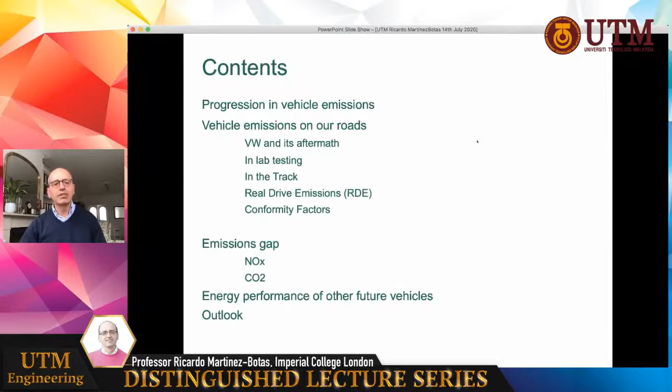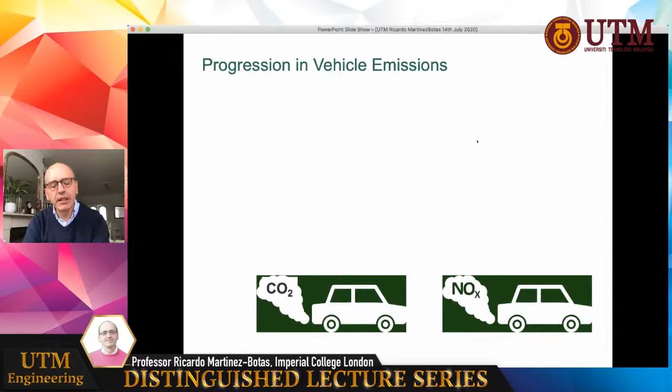So this is my talk, and I'm now going to concentrate on two elements, mostly two types of emission levels: a lot about NOx and some about CO2, and contributions to CO2. Much of this translates to gasoline engines as well, and certainly all of it translates to heavy-duty trucks, buses, and other machinery on our roads.

So you can see from the UK national statistics of air pollutants that kind of progression. If you start at 1970, we can see a substantial decrease from all emission levels. They're all centered at 100%, 100 units in 1970, and we can see how they project downwards. This is air quality in the country on average, and we can see all the level emissions going down. We can see NOx dropping 69% in that period, from 1970 to 2014. Particulate matter, sulfur dioxide, non-methane organic compounds, ammonia stayed more or less the same. It was never really that high.

And so clearly we've made some effort. We made some substantial progress in emission standards. Our air quality has got better, our pollutants have gone down, and mostly this has been provoked by regulation. This is the place where politicians, regulators, and air quality experts play a role — sustaining a decrease that industry resents, because industry of course has a product to sell, a product to enable, and a customer to satisfy. So our regulations enable them to get better products, and that is costly and time-consuming. And so we see a substantial decrease in all air quality.

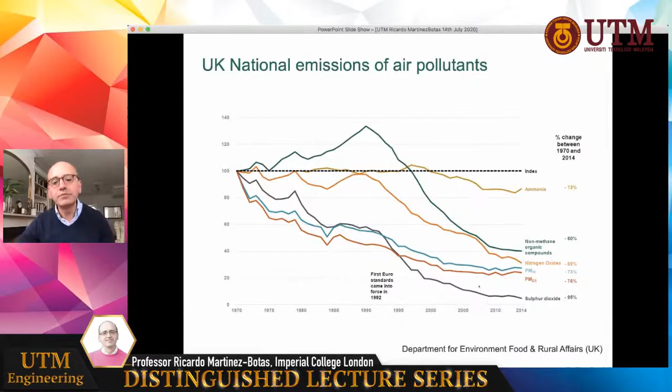This is just global air quality in the UK, as published. If we look at emission standards from vehicles, on the top diesels, on the bottom petrol, we can see that the Euro standards have enabled these changes. Just focus on a few of them, particularly on NOx — you could focus on the others. You can see that from Euro 3, the NOx standard in grams per kilometer was about 0.5.

And that has been reducing to get it to Euro 6, which is around 0.08 grams of NOx — 80 milligrams would be the figure per kilometer, and 180 milligrams would be the figure for Euro 5. Equally, you could see the emission standards being much lower when it comes to NOx in a gasoline environment, but higher in other matters. So all in all, of course, our standards have forced a change in the industry. And if we can see ourselves at Euro 5, possibly where Malaysia is sitting, Europe is now at Euro 6A, Euro 6B, now RDE — so even more advanced emission standard reduction systems.

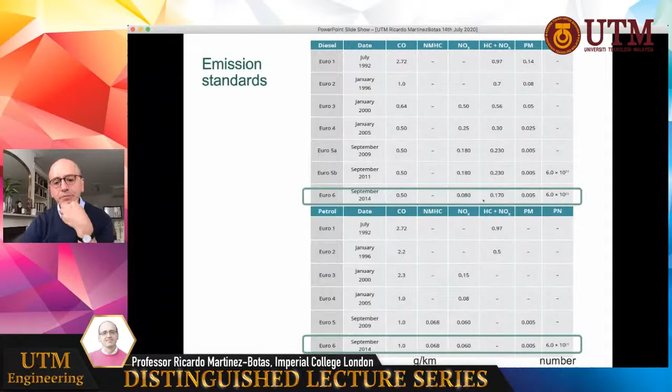If we then perhaps look at the improvements — because let's look at the positive side before I tell you a lot about the negative side of our air quality provoked by vehicles — the first one is here: the NOx limit of Euro 6 is 90% lower than 1992. So that's the reduction from 1992's emission standard to today, about 90%. If you look at the difference between Euro 6 and Euro 5, Euro 6 is reducing that emission level by 44% relative to Euro 5. So it is worth going from Euro 5 to Euro 6 — it is a very substantial decrease of NOx and other emittants.

Meeting the standards on busy roads remains a challenge, remains a huge challenge. In some areas, and if you take big cities and conurbations around the world, whether it's Kuala Lumpur or Johor on a busy day, you would say that vehicle emissions account...

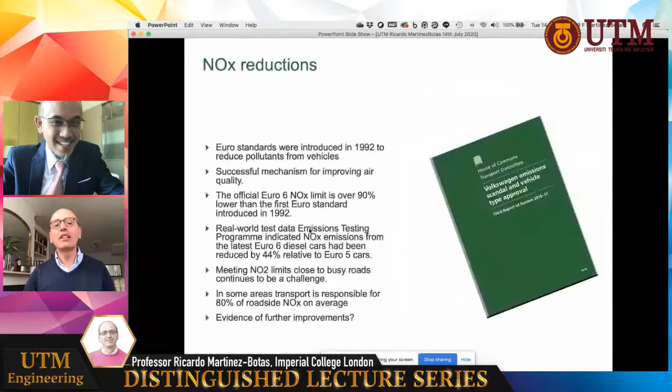I was explaining how our emission standards have improved over the years, focusing on the 90% reduction of NOx since 1992 with Euro 6, and the difference between Euro 5 and Euro 6 being a 44% improvement. It's worth going up to Euro 6 because you get a substantial benefit on air quality.

Typically, 80% of roadside emissions come from vehicles, and the remainder comes from other sources, whether tires, nearby industries, nearby household emission flues, or local industrial sites. But 80% of our air quality impact does account for vehicle emissions.

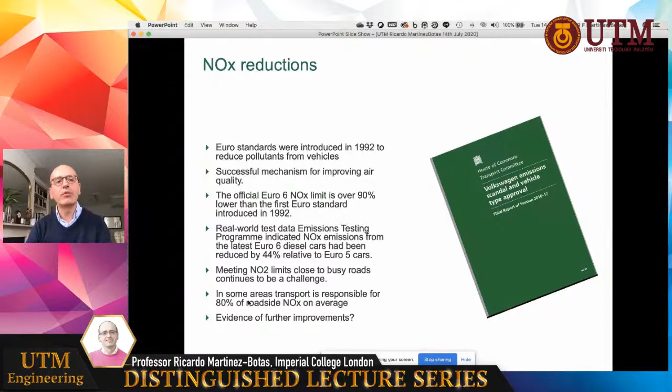With that in mind, we did a testing program and reported to the UK Parliament some years ago. This is the independent assessment I undertook. It was the biggest program we've undertaken on vehicle emission testing, a substantial investment, and I was the overseer. I'm going to tell you today about this.

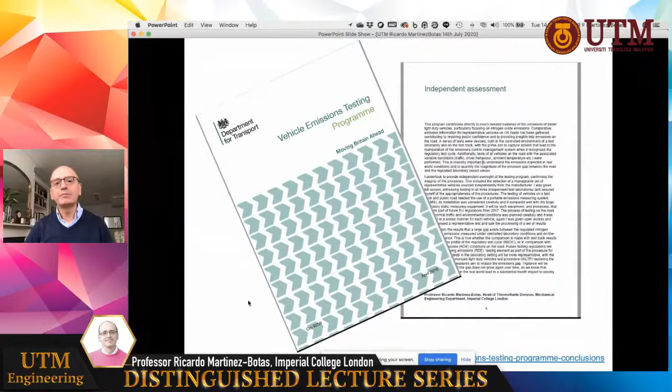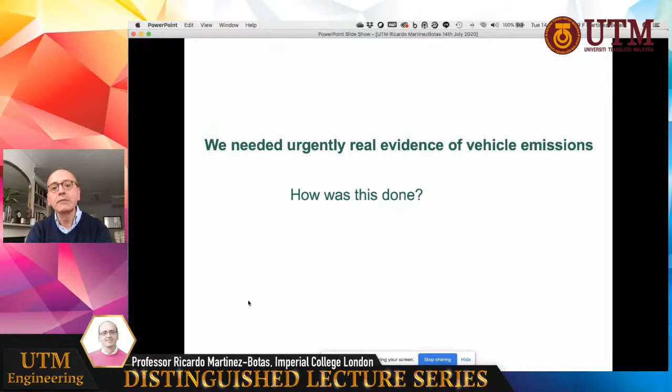We urgently needed evidence on vehicle emissions. We looked at the world, published data, what we could ascertain, companies, industrial partners, and automotive companies, and none of those was sufficiently robust for us to take policy decisions. Whether it's a question of trust or evidence, the fact is there was no evidence and no trust, and there still remains marginal difficulty trusting our automotive industrial companies, simply because of the aftermath of the Volkswagen cheating scandal. So we needed to do something.

Today I'm going to report on this and explain how we undertook it. We looked at all the top-selling cars, trying to capture 75% of the top 70 vehicles, so we could capture a large proportion of all vehicles out there.

For diesel vehicles, we tried to capture all manufacturers that are major sellers in the UK. Where sharing of a vehicle class or engine class was possible, we wouldn't repeat the testing. We had an even split between Euro 5s and Euro 6s, trying to get a snapshot of NOx performance. That major endeavor took the best part of 9 months, many tens of people, and lots of investment by the UK government, producing a report that confirmed the difficulty in vehicle emissions as we see it today.

This was only a few years ago. I wonder if we did the testing today whether we'd see a substantial difference. I was commenting on how lockdown has changed this - lockdown since the 23rd of March or so in the UK, with a relief of lockdown in the last few weeks, has produced several effects.

The first is I can see the skies a lot bluer here in London - we're not quite in the middle of London, in Twickenham. If you're a rugby fan, you can see Twickenham Stadium nearby. Second, we can hear the birds a lot more; in fact, they're singing louder than ever. Third, we see fewer cars and less scent and smell, which is somewhat different.

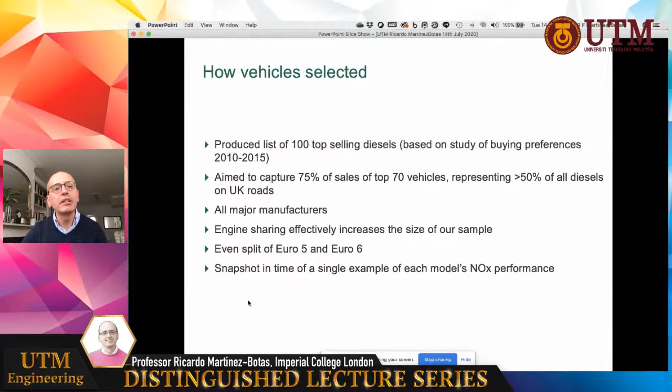This was our methodology. We didn't want to interfere, intervene, or communicate in any way with the car makers, in case they provided us a car we'd have to ask questions about. So we outsourced them from car hire fleets, many tens of vehicles, with no modifications or defects. They had to be under 30,000 miles, and we used the same grade of fuel for all. We undertook two tests with two pieces of equipment.

The first one is the standard laboratory-based equipment, which is large, maybe occupying the entire size of my lounge here behind me, and it contains a dynamometer with 4-wheel drive and an investment of many millions of pounds. That's how we would do the testing normally for certification.

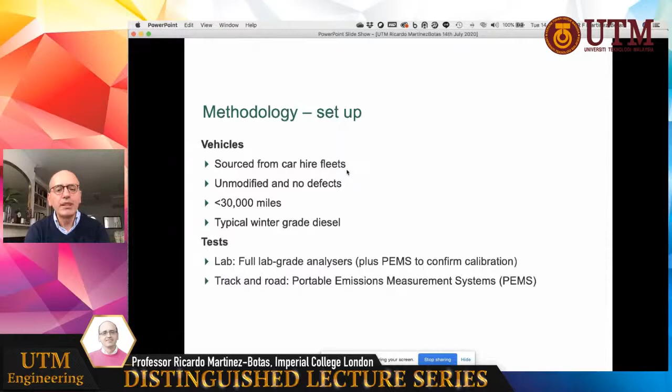The second way of doing it is we hired a PEMS, a portable emissions measurement system, which you will see a figure of in a minute, which we adapted and joined to the exhaust pipe of the vehicles. That was carried with the vehicle through the testing. So two sets of equipment, and the first one was on the dyno.

This is a vehicle from the Volkswagen Group, which we put into the standard vehicle certification procedures and undertook the vehicle certification procedures as given at that time.

Here you see on the right-hand side the speed trace needed: 0 kilometers per hour to 120 kilometers per hour, the faint gray line which I'm tracing with my mouse. This is what the dyno, this equipment, will be doing. It will force an acceleration and deceleration following the gray trace at lower speed, and finally mimic a high-speed drive on a motorway.

Over 1,200 seconds, and that is basically how the test was done up to that point. A car will be taken into the lab and undertake this sort of testing in a certification manner with an independent overseer, and they will say, yes, it meets the standard.

So here is the meeting of the standard for NOx, the red or orange-looking line, which is rather low because it's low speed. And when it gets to the spiking, the higher speed trace, 100 to 120 kilometers an hour, motorway mimicking, there will be a bigger NOx impact.

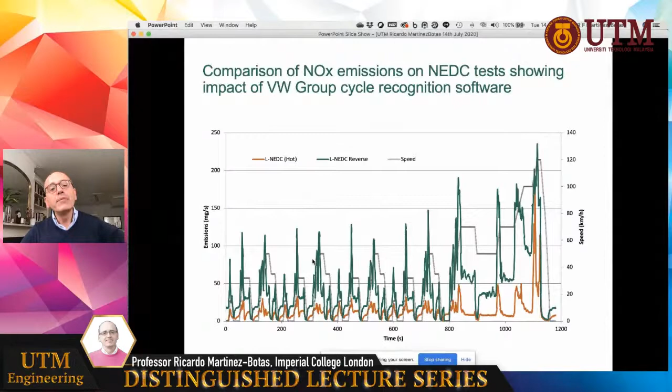Okay, one can argue endlessly over this matter. So then we said, right, if we now take a different Volkswagen Group vehicle which does not have the recognition software, well, indeed, it doesn't make a difference whether you go forward or backwards. Green and orange are approximately the same, rather low.

So that, of course, we knew that there were vehicles out there that would be cheating. Now, the question was, relevant to our seminar today, whether there was any other vehicle we tested with similar software recognition in it. And there weren't any. Of all the plethora of vehicles we tested, there were none.

And you can see this by this evidence. This is the summation of all the testing, not just one vehicle, but many tens of vehicles tested on the lab, where the standard would have been 180 or 80 in Euro 6, Euro 5 with 180 milligrams per kilometer. I might have said that incorrectly previously.

It was 0.18 grams per kilometer, or 180 milligrams per kilometer. More or less, all the vehicles comply to the standard. We actually did not find any vehicle, apart from the Volkswagen Group in that particular engine class, that had cheated the vehicle emission certification procedures. And that was many vehicles, so at least we satisfied one element: there aren't any other outliers out there trying to cheat in this manner.

So we leave Volkswagen to one side for now. We did our job, but our job continued because we wanted to know what is the real level of emissions, what is the public exposed to. This is why our cities, our environment are not in a good place yet, and why we have such enormous pressure to electrify, to get rid of and make obsolete our internal combustion engines. You'll see why in a minute, because the situation is not brilliant.

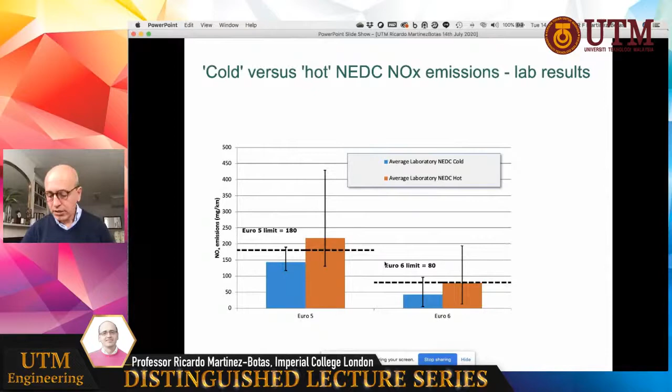Before we do that, let's do another experiment, a second one we undertook. We got our particle emission, portable emission testing procedure, put this equipment on the vehicle, connected it to the tailpipe, and undertook the same cycle we do in the laboratory with dynamometers and rollers moving the vehicle—but outdoors. We went to Millbrook, a beautiful place in the UK, a track mostly used for sports as well as certification, and took the vehicles around the track following precisely this schedule.

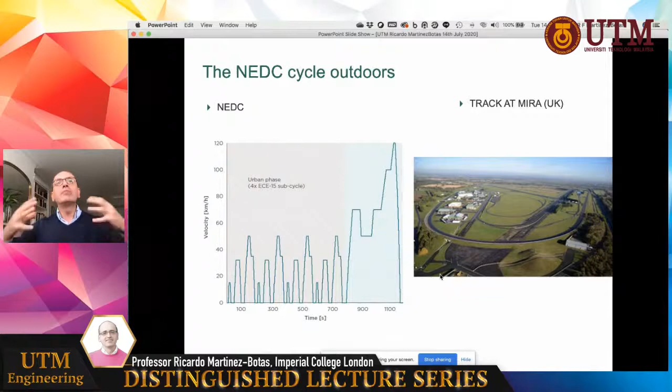For 100 seconds we'd be ramping up acceleration to about 50 kilometers an hour, and so on. There was a highly experienced driver following a digital meter, accelerating and decelerating with near total precision to this schedule. You might ask, should there be a difference between outdoor and indoor testing? There is some difference because the environment around you is different—there's some cornering on the track, though not a lot given those straights. There could be additional reasons, but in principle you'd say there should be no fundamental difference.

And yet when we did the testing, we found this—let's drill down a little more. We found that on average, the emission was by no means anywhere near the average here in orange compared to green, whether it's Euro 5 or Euro 6. So the average on the lab and the average on the track were massively different.

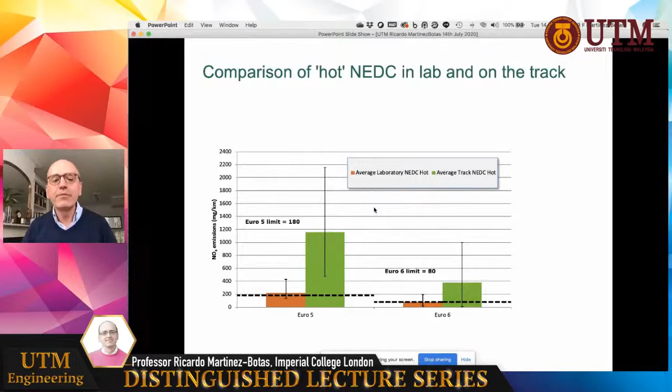Now, as an automotive engineer, you'd say: I'm undertaking the same trace, the same similar situation, and yet I'm experiencing something a lot bigger on average. Specifically, for certain vehicle classes, the standard they all met on the lab was 180, slightly below—but when it's hot, in a hot environment with the engine properly warmed and a fair comparison, it's maybe around 200, or 80.

There are no vehicles in Euro 5 that meet that standard. Some vehicles in Euro 6 did meet it, but they're all well above it—some reaching 2,200. The Range Rover Sport, a previous version compared to the current one—it's got better, I must say—look at that level. Or the Vauxhall Insignia, which should be meeting around 180, and the Vauxhall Astra and the Citroën. I don't want to single out any manufacturer, though I am, since it's public domain. And then another Range Rover—two Range Rovers performing rather differently. There is a temperature effect shown in this bar chart, indicating whether it's hot or cold.

Generally, the colder the day—around 6-7 degrees in winter—or the hotter day, closer to 15 degrees, there was some effect of air temperature. So it appears that the engine system knows air temperature, and it would adapt the exhaust gas recirculation system, the EGR, to stop it. The moment the EGR is switched off, vehicle emissions will obviously go substantially higher.

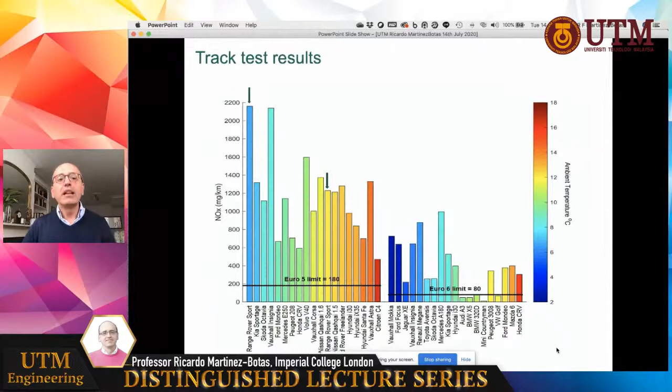What I can tell you is here is the equipment, the big laboratory equipment, where they connect the tailpipe to an analyzer, which is several cabinets big and costs millions of pounds. Here is the PEMS system connected to the back of the car with a tailpipe, and then an exhaust will be here. It's all done equally, to be fair. Trust me, this was done properly for many tens of vehicles.

And this is the track. First of all, the car on the track has an aerodynamic effect that is not as visible on the dyno. The dyno does know the aerodynamics because it has a coefficient of drag that sets the dyno wheels to mimic it. But there is some effect.

I think when testing, often vehicle developers have used the concept of flexibility. They've used the most favorable condition—maybe the most favorable of those coefficients—and therefore got the better outcome. The test temperature was different, the weight is slightly different, cornering is slightly different, and there may be some slight difference between emission equipment, though in fact the equipment was compared back to back and it was pretty good. So I think, in fairness, aerodynamics and flexibility are the two biggest differences.

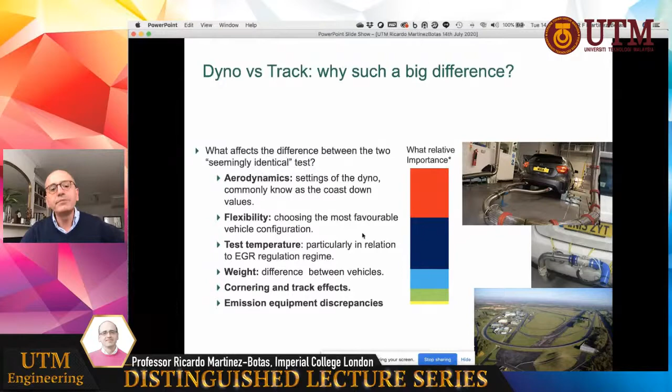So we then wanted to do representative testing. This is a bit like a story—the story says we're going to do real drive emissions, we're going to take the car. Here is the Skoda Fabia TDI, and we then took tens of vehicles not on a test track, but in the real environment, near Nuneaton in England.

I only witnessed it, I think, twice, and we did a whole journey, which I'm just imagining by that trace. That journey was 1.5 hours of continuous driving, with real environments including traffic, pedestrians, traffic lights, and high speed on the motorway with joining lanes and other vehicles. It included the prescribed urban, rural, and motorway portions—about a third each, not far off. It reverted back to Nuneaton, where the system was checked and disassembled, ready for the next vehicle, and that was done for each and every one of those vehicles.

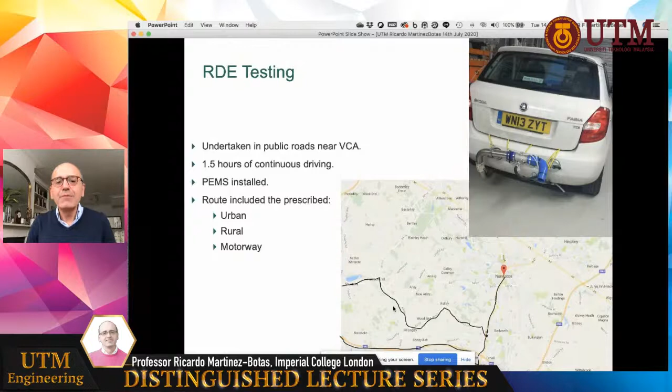So that is the closest you could say one can come to real life, right? So if it's the closest we can come to real life, what was the outcome? Let's take Euro 5—similar to Malaysia—so you shouldn't be terribly happy with your own vehicle levels, because I think they're substantially higher than they should be.

When undertaken for all these vehicles—the names and models are there—well, if the standard was about 180-200, the average on the road was bordering 1,200 milligrams per kilometer, and all the other emissions followed. In other words, no matter which one, some are massively higher. I already mentioned the Insignia, the Range Rover Sport, the Hyundai Santa Fe, and a few others. And some rather good ones—you could say the Citroën C4, Peugeot 208—there are some good ones and not so good ones.

No matter what, 1,150 milligrams per kilometer—that is the average emission over a 1.5-hour drive. And what is the point of regulating for 180? There is a point, because the next slide will show you why there is a point of tightening it.

If you look at the Euro 5, Euro 6s, these are most relevant to us. Remember that most of these vehicles are still on the road, and remember that it takes about 10 years or so, depending on the nation, to have a substantial turnover of vehicles. So no matter what, these vehicles are on the road today.

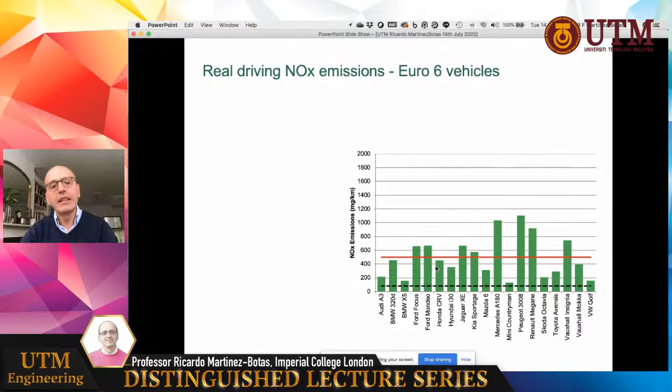The levels of emissions today are a little better than they were, though it will take some years for the fleet to renew. For Euro 6, the standard was 80, but the average emission is around 500.

There were some huge outliers, like the Peugeot 3008 and Renault Megane, but also some fantastic performances from the VW Golf, the one without the engine that had all the dodgy software, the Mini Countryman, outstanding, the Audi A3, and the BMW X5, a rather big car performing beautifully well.

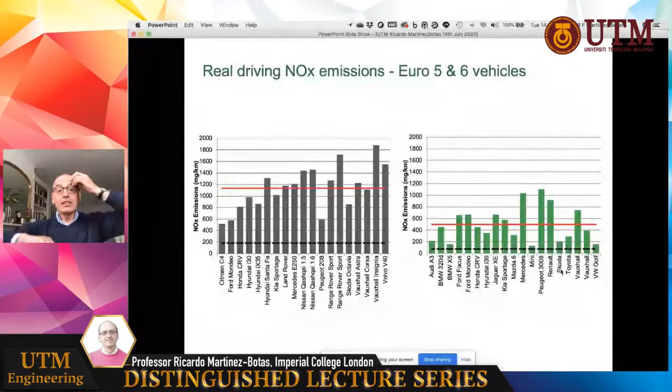None of them met the standard on the road, with the average about 500. If you compare Euro 5 and Euro 6, you'll be satisfied with one thing: Euro 5s are worse than Euro 6. Regulating to 80 compared to 180 is better because the whole thing shrinks down, but actually the average of Euro 6s is about 500, while the average of Euro 5 is 1,150 or so.

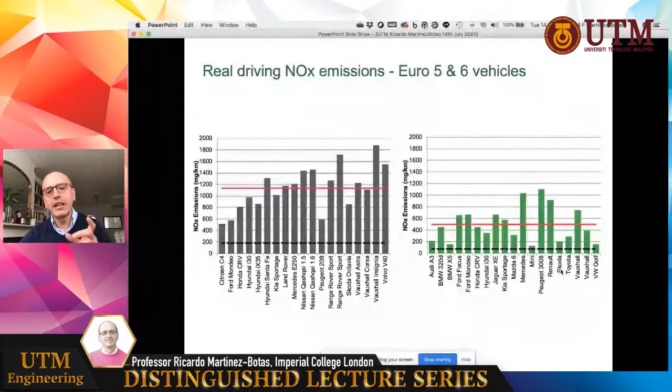Still a long way from what we intended. This is better visualized by the next graph, which is rather complex. I've only taken Euro 6s here. What I've done is taken the ratio of what they delivered on the road to what they should have delivered, or rather what was regulated in the test environment in the lab.

So where number one is parity, any vehicle that makes 1 means it's emitting 80. This is how Euro 6B, and Euro 7 coming, will say that we want to develop a conformity factor, a CF, and set a number. You can see that if we were to apply any conformity factor to these vehicles, only 3 meet anything less than 2.1, with 2.1 being a possible number.

The BMW X5, the Mini Countryman, and the Volkswagen Golf. The others are not just 3, 4, 5, 6, 7, 10, 12, 13, 14 times what they should be. The average conformity factor of these super advanced Euro 6 vehicles is 6.2, and that is the evidence we needed to say we are not getting to the standards we would like our nations to be.

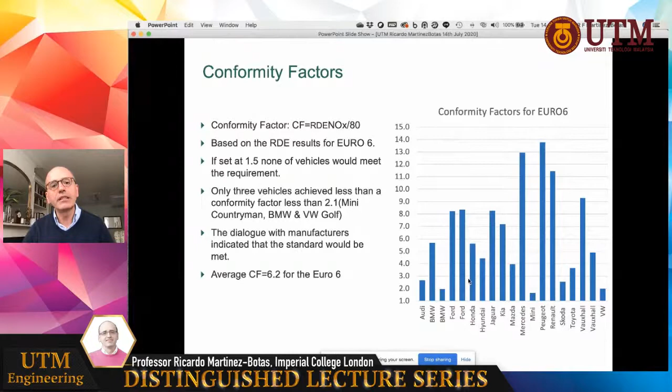So the evidence is astoundingly bad. The interesting thing, as I come toward the latter part of the presentation, conscious of time, is that we did something rather naughty. We plotted together the real drive in blue for all these vehicles versus the simulated track following a very tight prescribed speed trace.

These are very different things. On the track, you're prescribing without traffic, without pedestrians, without traffic lights, a very precise, tight testing procedure. On the road, you have the day change from morning to evening, though it's usually done at midday, in fact we did it then, plus all the traffic, traffic lights, pedestrians, acceleration and deceleration, and the ability of the driver to just drive, since they're all different drivers.

There'll be absolutely no reason why these two are correlated, and yet the evidence shows the strongest correlation. So clearly, the way our diesel technology is enabled is not capturing the reality of emission levels. Whether you do a very narrow, tightly controlled test on the track, or 1.5 hours with real traffic, the numbers come up almost the same, which is rather shocking. This is to do with the way the emission equipment is enabled.

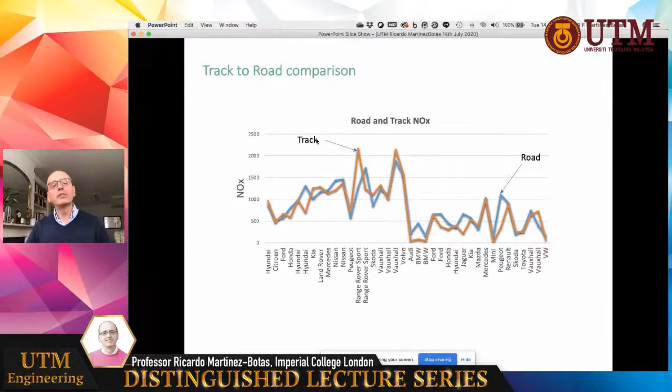So, some observations: there's a very large difference between laboratory and track, and some temperature-dependency strategies they use, with the justification being to protect the engine from damage. As a manufacturer, I can put in and enable or disable some procedures on the vehicle emission system to enable some protection of the engine, and under that framework, legally, there is a loophole.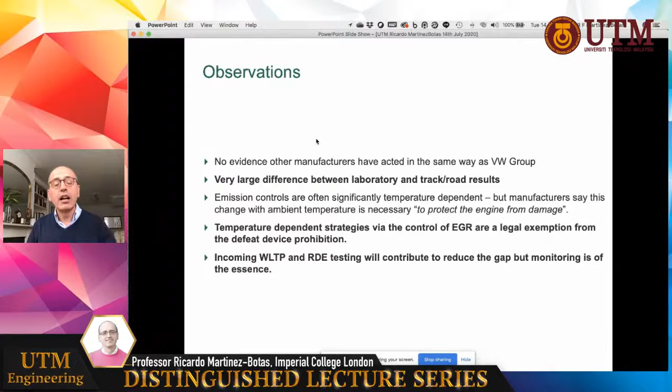There's a loophole through which legally engine developers can get through because they are protecting the engine. Now, in some cases, yes. In some cases, no. And the evidence is strong for the latter than the former. The evidence is strong to say that observation I had a minute ago is not in line, and is not in line in magnitude with what the engine needs to be done to protect it.

The last part of my talk, as I come towards the end, is to discuss the emissions gap. The emissions gap is to do with the following: if we have a technology through which we improve it, and in that improvement we get our emissions lower, is it possible, or is there any evidence that the emission levels in real life get worse? In other words, you regulate something which is in a tight environment of testing conditions. Does that mean that you might increase or decrease your outdoors real drive emission output?

You would say that if you regulate something to lower emissions, you should be able to lower also the level of emissions on the road. So divergence will mean that while you get a benefit in a tight environment of testing, you're not getting the equivalent benefit in real life, if it's a divergence in the negative sense.

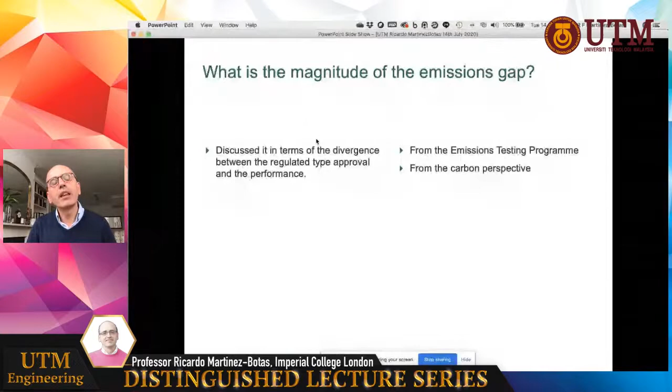If you look at NOx, if you look at CO2, we see a bubble here, and this bubble is Euro 5 vehicles. I didn't put labels, and this is Euro 6s. Euro 5s have got better, so Euro 6 got better than Euro 5s. The averaging should be around 80. This is 180, mentioned many times in my talk.

Here in the vertical axis is the divergence from road relative to dyno, where divergence of 1 means equality. It means the vehicle on the road is going to have a similar level of emission as the vehicle on the dyno. Well, there are no vehicles on 1, we know that. But there are many vehicles that as we diverge, we go down from the average, which is where those two broken lines cross. Well, it looks as if we've gone from about 8, 9 to about 11.

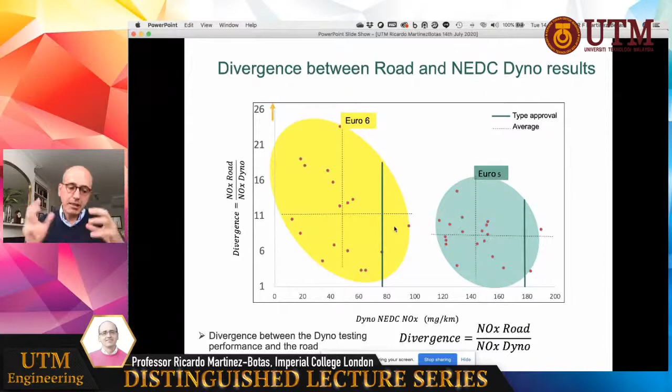So there has been some divergence, and we better acknowledge that. We got better, everything is better, but the divergence relative to what we should be meeting, which is a better standard, on the road has increased.

What about CO2? We look at CO2. Here is a plot of all the CO2 footprint of all those vehicles. Here in blue are the Euro 5, Euro 6 in orange. And you could say some vehicles are way out because they're bigger cars, they're bigger vehicles, unregulated, and they're sort of in the 200 grams per kilometer. Today's emission standards in Europe is 95 for new build, which is why the axis starts at 95.

At that time, 70% of the vehicles would not be meeting that standard. In fact, none of them would be meeting that standard except hybrids. Here we got in the vertical axis, so we understand better, but still there's a lot of Euro 6s, Euro 5s doing rather well in CO2, not doing well in NOx.

Here's the divergence. It's saying, how far is my CO2 footprint on the road relative to the testing in the lab environment? And if we take a 30%, it says 30% worse off, 45% worse off. So if you take this particular vehicle here, it's got better in the lab, but when you put it on the road, it's actually emitted 45% more CO2 than it should have.

If we take that 'should have' as a strong word, which is not legally binding, you could say there is a divergence because the Euro 5s diverge in the real environment relative to the lab around 19%. While they got better on average to Euro 6, Euro 6 now diverge 25%, and some a lot more. So there is an effect of divergence. Our vehicles, while they're getting better in one aspect, maybe are not getting better in some other aspects, and CO2 being one, there is some evidence of divergence, which is not just coming from me.

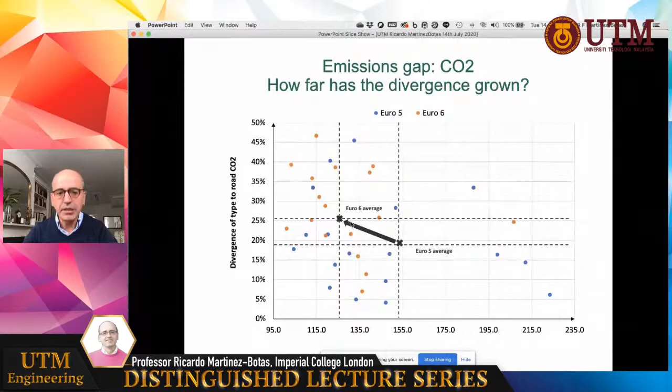I think probably I'll just do one slide on the future, only to look at CO2, and we look at a trajectory over time. I gave a lecture already on CO2, a long lecture, and this is one slide from that lecture at UTM. So in 2010, 160 being the figure, getting better on average, 135 about 2015. Today, regulated to 95, so it's a nice decrease of a CO2 footprint.

And today, in fact, we are regulating to 0 at 2050, not even 80% of that, to 0 at 2050. So there's got to be a trajectory towards 0 or net 0. Here I plot what I think is the lowest possible level of a diesel and lowest possible level of any hybrid, so that it's not going to take long before we are not able to meet lower CO2 footprint with either diesel direct drive or hybrids.

So no wonder we're thinking we've got to do lots of electrification. Hand in hand with our electrification, we need to see the grid decarbonization continue, that blue line continuing to net 0. So you see many drivers: the electricity network has to lower to net 0, and the fleet will have to go outside direct drive and outside hybrids if it's going to meet 0.

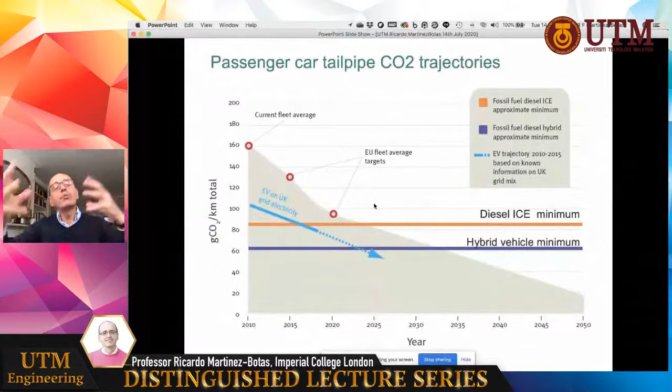I think with this I finish. Apologies, I had a few minutes where I stepped out due to the internet, but hopefully we didn't waste too much time. With that, I think, Rafiq, I've finished my talk.

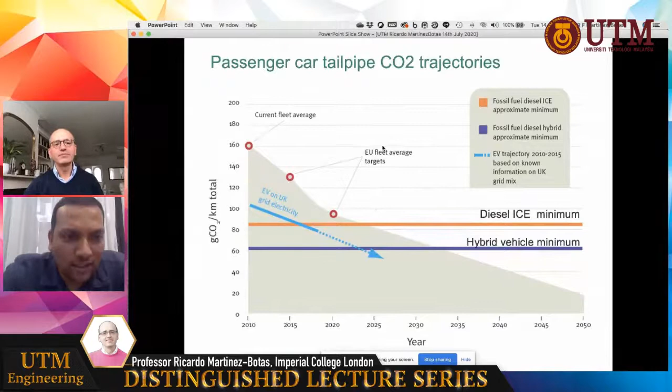Thank you, Ricardo. It was a very interesting talk. I think a lot of the data that you showed is probably very new for people in the talk. So I now open for questions. People in the audience who are listening, if you have any question for Professor Ricardo, please post your question, I think it should be in Facebook. We will ask him. While we wait for the question to come in, Ricardo, maybe I can ask you something.

So you are very familiar with Malaysia and in fact Southeast Asia, and we know Southeast Asia lags behind when it comes to emission regulation, right? Most of the regulations are done either in Europe or in America, and we tend to adopt them. But I think we've had this private chat many times that the socioeconomic situation of people in Southeast Asia is very different than Europe and America. So what are your thoughts on this? How are we going to catch up to the emission regulation, which is mostly coming from Europe and America, and cater to our need so it fits our socioeconomic situation, especially not only in Malaysia, I'm talking about Southeast Asia.

Great, thank you, Dr. Rafiq. So I think I'm going to answer the question, but let me start with a comment. If Southeast Asia does not decarbonize and does not improve air quality, there's no point doing it anywhere. Southeast Asia is such a large concentration of individuals and people. And if you throw in India, and Pakistan, and maybe even China for the sake of it, what is the point of us doing anything if those nations do not decarbonize and improve air quality? So while the UK is getting better, the United States may be getting a little better, the rest of Europe is definitely getting better, we're just a minor proportion of the global planet's CO2. So it is absolutely essential that Malaysia, as one of the center hubs of Southeast Asia, leads the way. Because I think if you don't lead the way, others might or might not lead the way. You are positioned to be able to lead the way.

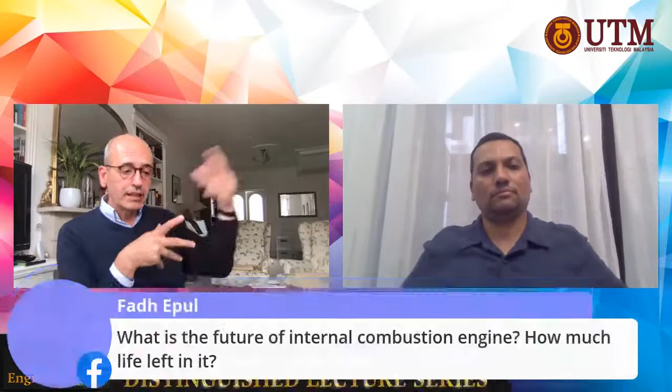So what can be done? Well, we've done a lot. If you look at RDE Euro 7 coming up, this is a fantastically reduced level of emissions compared to the baseline, but it still may not be sufficient to call it a healthy standard. It's a very difficult thing for me to say, and I think we still need to do a lot better - just on air quality rather than CO2. I hope that helps.

What is the future of the internal combustion engine? I must answer the question, right? So what are your thoughts on this? I think the internal combustion engine is changing, is evolving.

The internal combustion engine is becoming less direct drive, more hybridized. It's being tuned, adjusted, and optimized for a narrow set of conditions. It's now able to talk to the battery system, able to talk to the motors and generators in a hybrid fashion. I think that will continue for the foreseeable future. The reason is it's very hard to transition to a completely new technology given the time frame, cost, social acceptability, equality, and justice concerns with rapid change.

So it's going to take time. I believe it will continue with us, and if we were able to develop a carbon neutral fuel, it would still continue for a long time - heavy duty being one example, but even outside the big cities you might still enable IC engines to operate. As time goes on, the pressure becomes stronger on them being absolutely clean, and hopefully the technology of EVs and plug-in hybrids revolutionizes in the next few years.